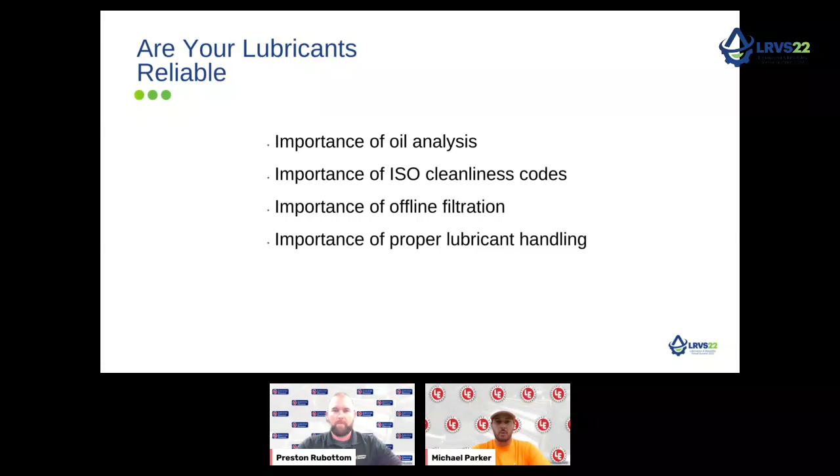Absolutely. So our presentation, are your lubricants reliable? Today we're going to touch on 4 topics: the importance of oil analysis, importance of ISO cleanliness codes, the importance of offline filtration, and importance of proper lubricant handling. So these 4 topics are what we feel as an organization are most important to achieving best practice to the reliability of your lubricants and keeping your lubricants and assets reliable and clean. So I will start this off.

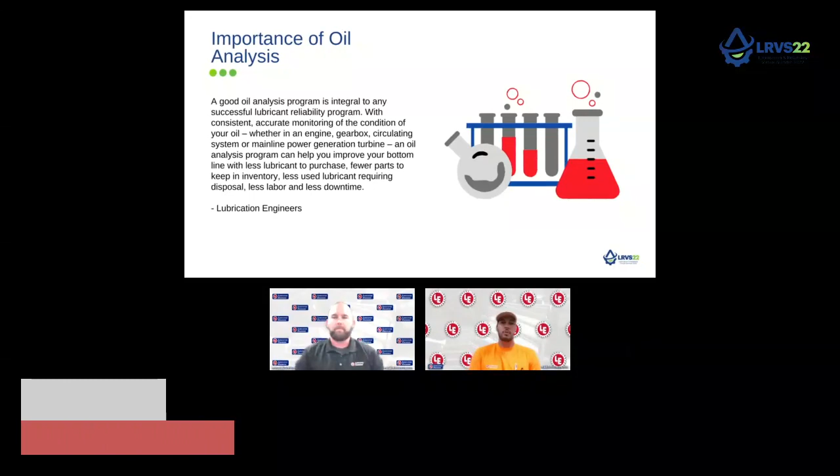Importance of oil analysis. So a good oil analysis program, right? Why is this important? Well, a good oil analysis program is integral to any successful lubricant and reliability program. With consistent, accurate monitoring of the condition of your oil, whether it is an engine, gearbox, circulating system, or a mainline power generation turbine, an oil analysis program can help you improve your bottom line with less lubricant to purchase, fewer parts to keep in inventory, less used lubricant requiring disposal, and less labor and downtime.

So when we think about lubricants and oil analysis, we think about these 2 things as being the backbone of your lubrication reliability program. So a severity scale: when we run an oil analysis, the first thing we look at on these charts that come to mind is a scale, right? You want to definitely see where you're at in a range. So the severity scale ranges from 0 to 4. And with these different ranges, you will see different language that presents itself in the comment section.

So typically 0, you're good. You're in normal limits. Your lubricants, they look great. Your assets operate like they need to, and everything's smooth. You really don't have to worry about anything. When you see 1 come along on these reports, generally the language you'll see in the comments is minor. So contamination is at a minor level. Around this time, you're kind of monitoring it, but you're really not planning to do a whole lot. I would recommend personally that you maybe pull another oil sample a little sooner just to see where you're at.

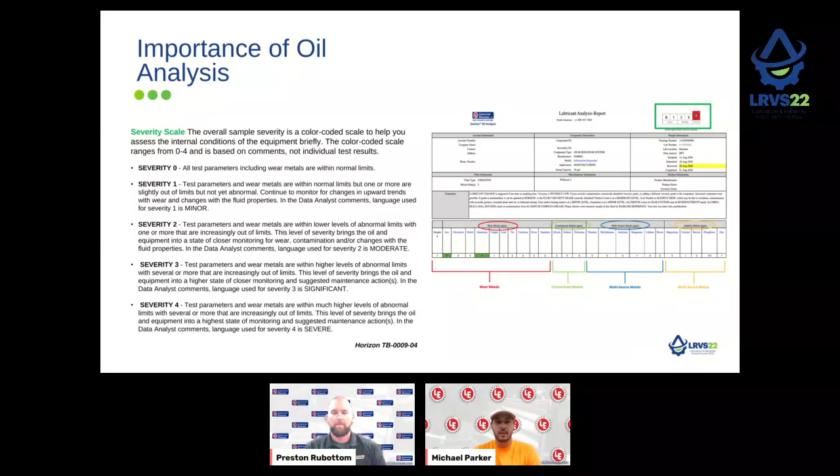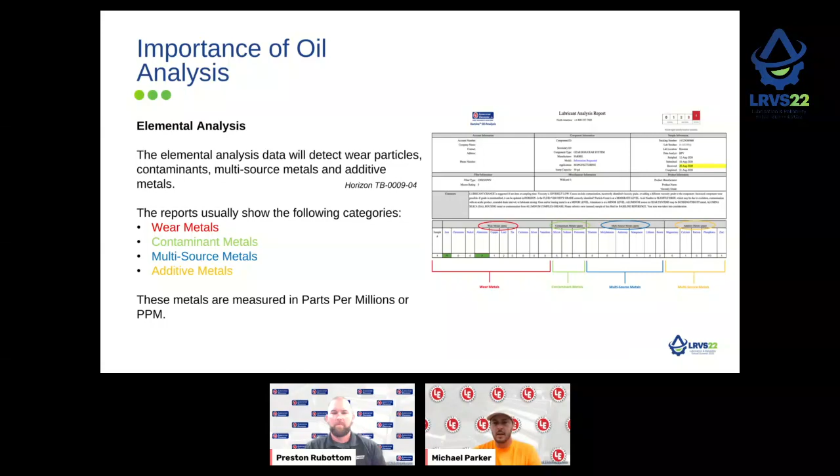So moving on. So you have 4 different categories on oil analysis. You'll have wear metals, contaminant metals, multi-source metals, and additive metals on these reports. As you can see, we have these highlighted. So these would be different categories that you would want to look at, and we'll dive into each one of these.

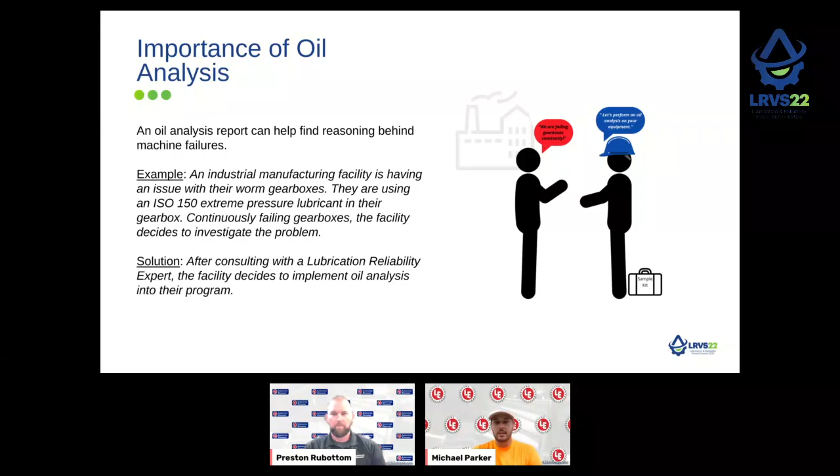So here's an example of a company that would need to look at having an oil analysis, right? This is a typical industrial manufacturing facility. They're having an issue with the worm gearbox. They've identified that they are currently using an ISO 150 extreme pressure lubricant in their gearbox, but constantly failing these gearboxes. They decide that they need to reach out to someone. So after they consult with a lubrication reliability expert, they decide to implement this oil analysis into their program to see what they can find as the cause of these failures.

So wear metals, going back to this, when you're running an oil analysis, you don't want to think of it as just the oil that you're analyzing, right? This is a bigger picture than that. You're actually diving into the equipment. You're looking at different wear patterns and trying to determine what is the cause. So wear metals can identify components within the machine that are wearing.

And it becomes really important here to understand the information that you are providing to the oil analysis company when you're submitting reports. And it's very important to submit all the information that is available to you. So all the OEM information, this will help to let the laboratory know what type of metal is in this unit. And if we see that flagged on these reports, we have a baseline to say where we at least think this is coming from.

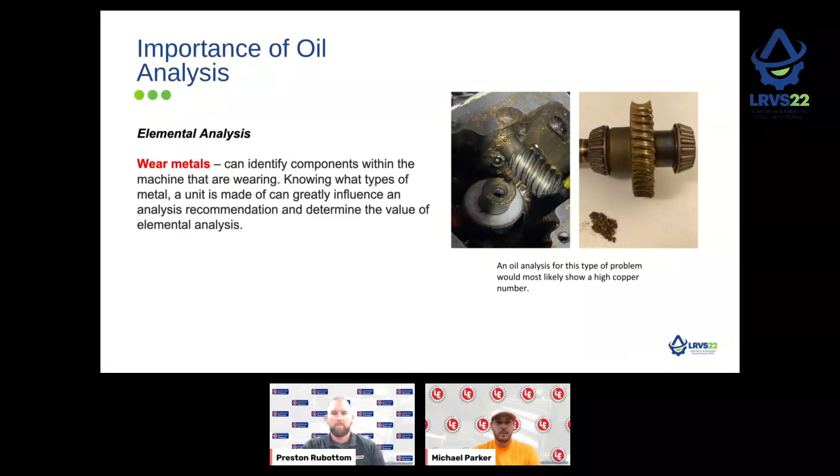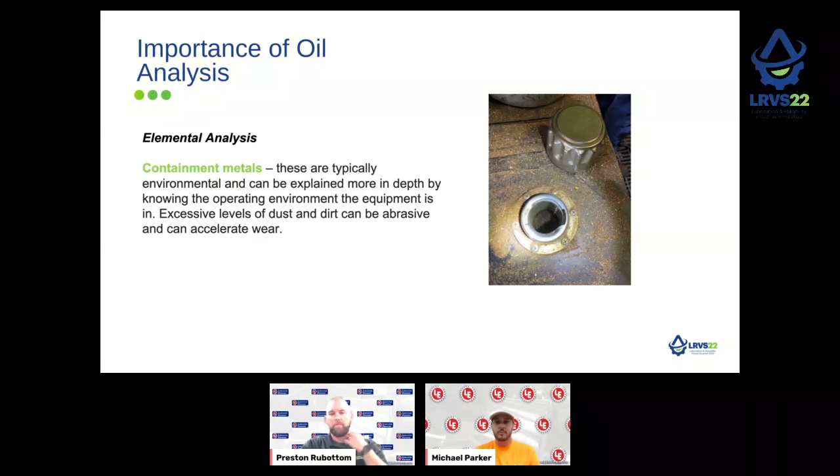So then we get into contaminant metals. These are typically environmental, and they can be explained more in depth by knowing the operating environment and the equipment. So again, it's very important to document everything when you're pulling these samples and submitting them to a lab. That way we kind of know what we're seeing in the report. This picture shows where an HPU unit has had the top left off of it, and it has been exposed to particle contamination.

Then you have multi-source metals and additive metals. These types of contaminants can turn up in test results for a number of reasons. The majority of the time, this is going to be the breakdown of your product. That's what you're going to see on these reports. So phosphorus, for example, going back to the gearbox example, if you have a report and you have a worm gearbox and you've identified that you were using an EP product, well, you're going to see that trend in this report. It's going to show a high phosphorus number, as that is what's used in an EP gear oil.

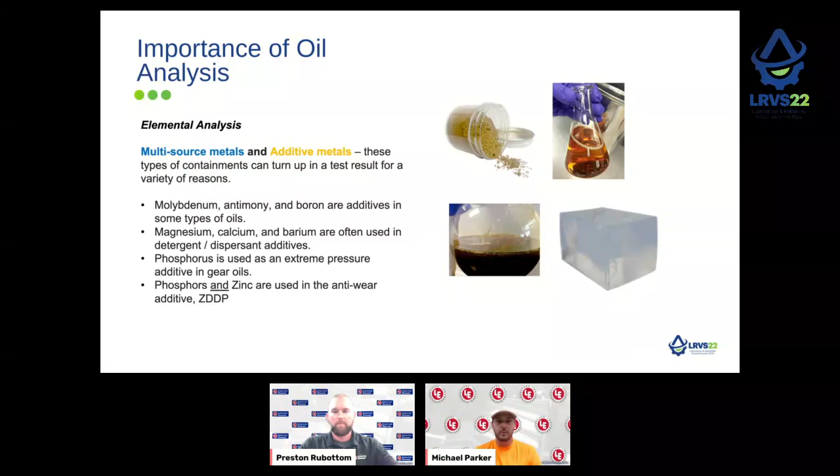So just kind of establishing, this is very beneficial for people that don't know what they're using. Maybe you had a new maintenance manager come in and he's trying to see the different lubricants and put that into perspective of these results and the equipment. This would be very powerful for them to tell, hey, these are the additive packs that we're seeing, and these are the lubricants we're using.

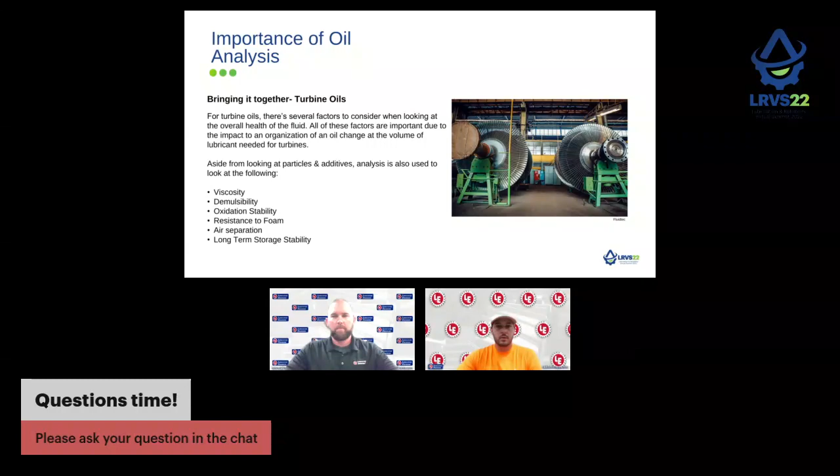So turbine oils, Preston, I was going to let you touch on this. You good with that? Yeah, absolutely. Great job.

So I kind of want to bring all that together, right? So we're looking at elemental, we're looking at contamination, we're looking at multi-source metals. What does it look like in the real application, and what else are we looking at? That's what I want to bring to light here. So for that example, I use turbine oils. Turbine oils can go very, very deep, understanding the chemistry packages and the wear modes. But fundamental knowledge is kind of what I captured here.

So for turbine oils, there's several factors to consider when looking at the overall health of the fluid. All of these factors are so important with turbine oils because there's a large volume of oil needed, specifically for steam turbine oils. So for an organization to change out, say, 10 or 20,000 gallons, it's quite the investment. So we really want to understand the full spectrum of the lubricant that's in the machine. So we typically look at the following properties. We look at the viscosity to make sure that the fluid film strength is there to protect the surfaces that the fluid is surrounding.

We also look at demulsibility, so the ability to shed water. Super important when you have a steam turbine with potential water ingression to have a good demulsibility rate. You want to shed that water from the oil and not emulsify. You want to be able to filter that out and remove it. Oxidation stability, the long-term life of that fluid is critical to know to give a proper planning process there.

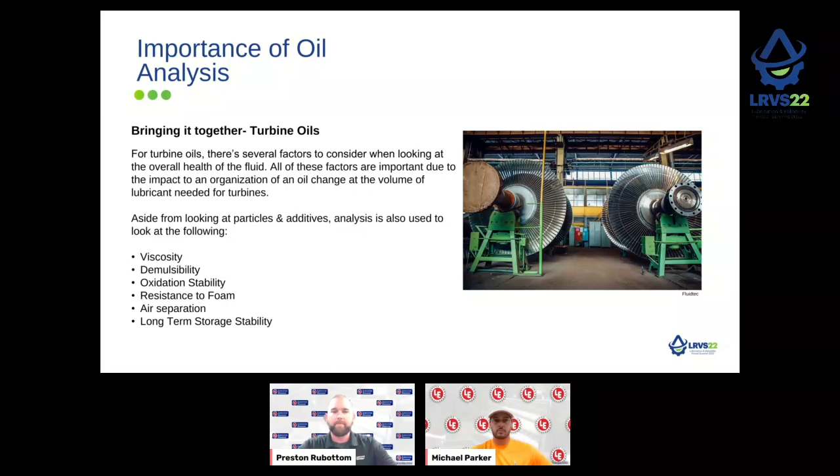Yeah, okay, thank you, Preston.

I'm sorry. Absolutely. So as we're looking at oil analysis, it's important to understand the ISO particle count. So we're going to dive into what ISO cleanliness is and what the particle count is. The ISO code is the standardized code of how many particles are in a sample when it's sent into the laboratory. So we use this scale to quantify the particulate contamination per milliliter of fluid. Each of these numbers represents the correlating particle size of 4, 6, and 14 micron particles. So each code includes all particles of the specified size or larger.

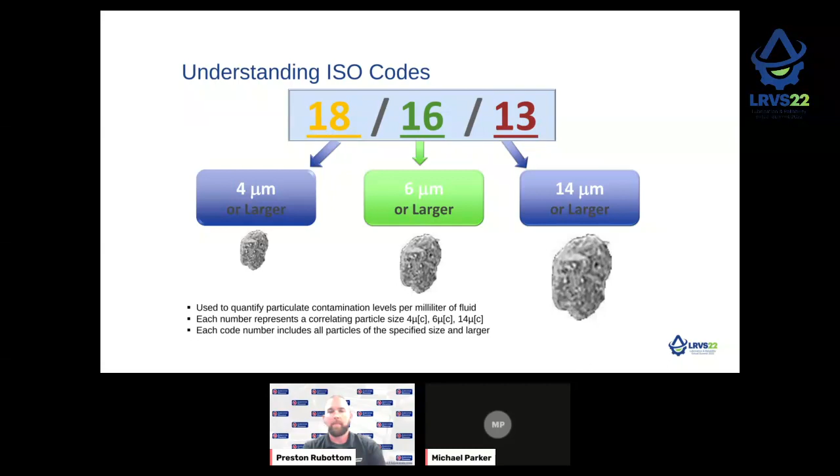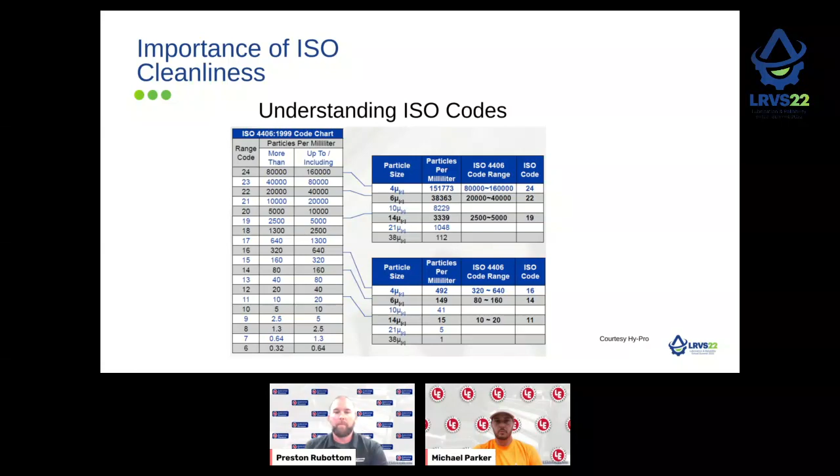So although you're armed with the knowledge of, hey, we have a 16, 14, 12 ISO particle count, well, what does that mean? How do I understand what fluid cleanliness needs to be for a certain asset? There are certain targets that are industry standards that are available for you to review and set up as your target for your program to make sure that the fluid is clean enough for the tolerances within that machine. So these are some examples here.

Obviously, the higher the pressure, the tighter the tolerances of the machine, the cleaner the fluid needs to be. So with hydraulics, with servo valves, you want something around 15, 13, 11. That's extremely clean. You're going to have efficient filters in place, and you're going to have a very good scheduled process for filtration. Something with larger tolerances, such as a gearbox, you have a higher particle count.

At the bottom of this chart, you can see where they're recommending a filter micron of 12 micron for gearboxes, whereas if you need a count achieved of 15, 13, 10, you'd use a 5 micron. So the tighter the tolerance, the more strenuous the path, you're going to have a lot more cleaning capabilities with those.

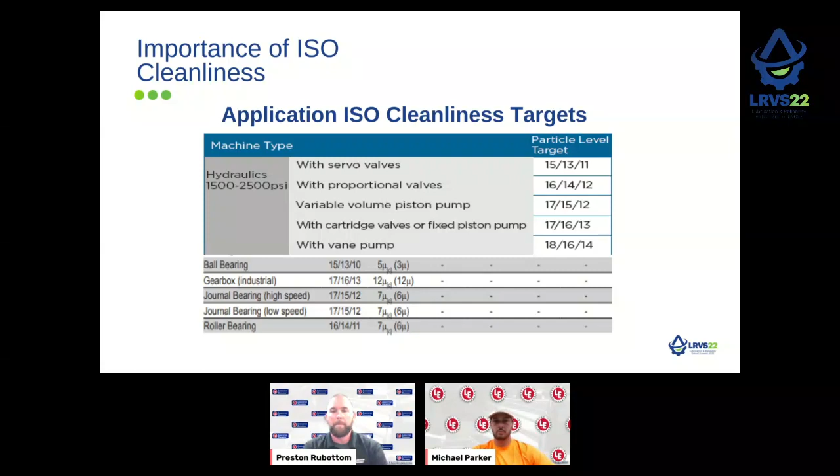So this is really what it comes down to with filtration. We want to extend the life of the asset, right? We not only want to extend the life of the asset, but also the fluid. So these are target codes of fluids where we're looking at two different assets, a rolling contact bearing or a hydraulic component. So for example, if you have a sample that comes back, say the hydraulic unit, it comes back at 25, 23, 20, like Michael just showed the picture of a hydraulic power unit that was heavily contaminated.

So we can see the visual contamination, knowing that the human eye can see down to 40 micron. Those particulates are very large that we need to remove and keep from going in there. So we have extremely dirty hydraulic oil, 25, 23, 20 comes back. If we have effective filtration, it can stop the contamination and ingression, get down to, say, 16, 14, 11, that target code. We're going to extend the life of the componentry of the whole asset train five or more times. So it's critical for the life extension of that machine, also the overall runtime.

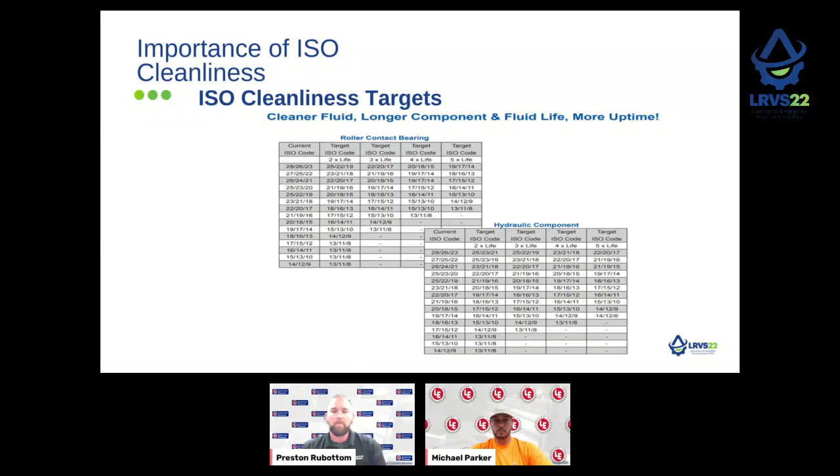So we talk about the particle ingression, but what does that have to do with the overall usefulness of that machine? Well, it's been said that 70% of loss of machine life is due to surface degradation. So again, a hydraulic unit, 1500, 2500 PSI, severely dirty oil acts almost as a mechanical sandblaster, eroding all the surfaces of the machine, either tight tolerance valves or rubber components, that continually compound and get dirtier and dirtier, that ultimately leads to failure.

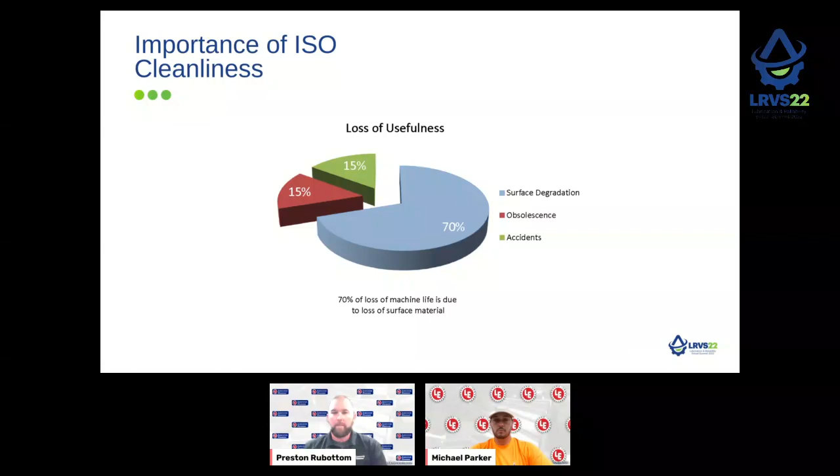So of that 70%, we look at how the wear mechanisms are formed. We have three-body abrasion, which is the contamination from outside sources or internal degradation of surfaces. We also have 8% erosion and fatigue. So altogether, 82% of that mechanical wear is caused by particulate contamination, either generated inside from having dirty fluid circulate or taken in from outside sources. So filtration is critical, but also understanding where to start with your ISO particle count is the first step.

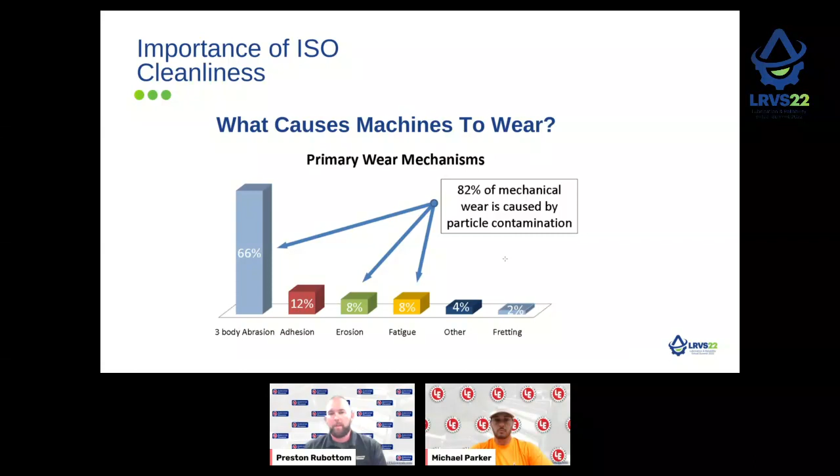Okay, so we know the particle counts. We're understanding how to scale and where we need to go. We have our target ISO particle counts, but how do we get there? So we're going to look at a few different offline filtration options here.

Why do we need to filter? So brand new oil coming to the facility in drums, totes, pails, even tankers doesn't meet the cleanliness codes that I showed before. So for this reason, brand new oil should be filtered, either as it's going into the asset with a filter cart like you see here on the left, or with your storage system that has dedicated filtration. So knowing that your fluid is clean before it goes to the asset is going to be very advantageous.

Some people will also say, hey, we have inline filtration on the machine, so we have spin-on filters and other bag-type filters, duplex filters on the machine. Isn't that good enough? And typically the answer is no. So we're looking at different efficiencies of filters and mechanisms within the filter housings that could potentially lead to dirty fluid being circulated around the system. And also understand that offline filtration is called depth filtration in more cases than not, because it's a very tight path of travel to capture very small particulates.

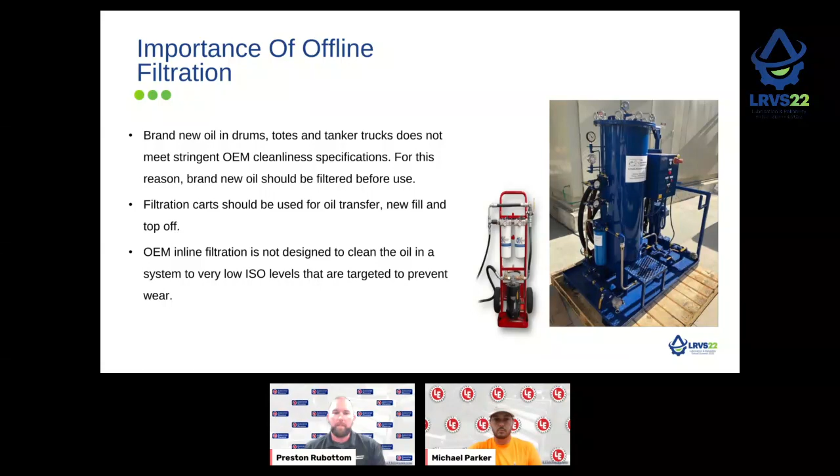So looking at different types of contamination, water, as I mentioned earlier with the steam turbine, is a very large potential contamination. So we want to understand that there are tools available to remove water from lube oil. Through the process of vacuum distillation, all the water contamination is removed, so free, emulsified and dissolved water.

This system works by pulling a vacuum on the upper chamber. So you have lubricant that's emulsified with water. As this vacuum chamber comes down, we're boiling off the water, so we're able to evaporate the water out under a little bit of heat with vacuum. We also use the same principles with gases, so we can pull process gases or different gases that get in lube oil out with this system. These systems are also equipped with a particulate removal system, so very effective filtration, removing a large percentage of contamination per pass.

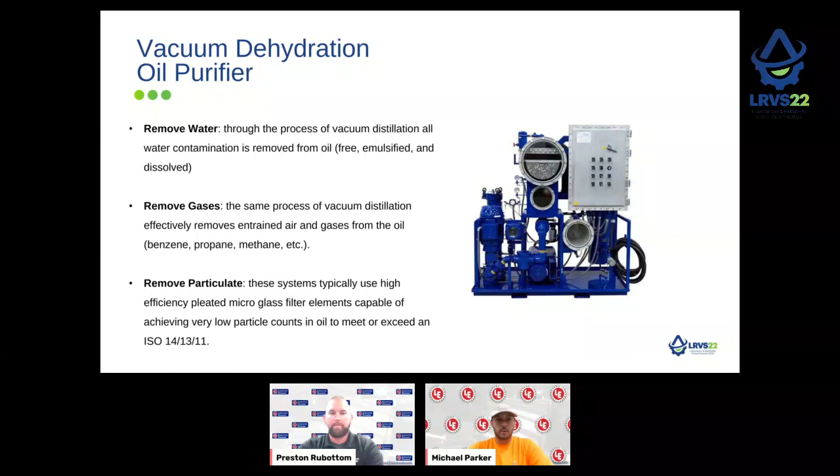Okay. Next slide. Yeah, has it popped up yet? Yep. Sorry, okay. A little delay on my end, I guess.

The next contamination we talked about is varnish potential in turbine oils. Very effective filtration here. This process uses either granular adsorbent or depth media to filter out and remove dissolved and suspended oil degradation products. All of those products actually lead to varnish, so we're trying to get ahead of that varnish plating out by using this offline filtration system. Varnish removal is often accomplished with oxidatively stable media engineered to selectively remove varnish contaminants. So we're not going to pull additives out or worry about changing the chemistry, solely the contaminants that lead to varnish.

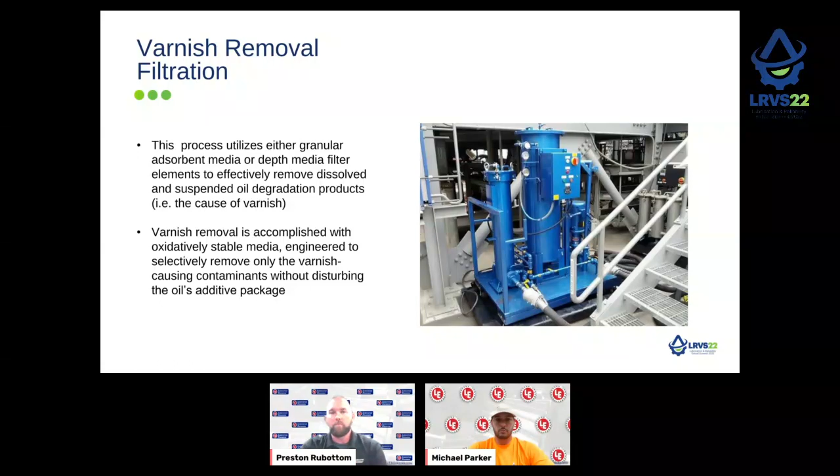So I mentioned there are several different types of filtration, and filtration is not one size fits all. Just a couple of key points when you're looking at filtration: filtration systems must be configured properly for optimal performance, considering the tank size, the oil viscosity, and oil temperature. We have to understand what the flow rates are, and how we can effectively filter in a timely manner.

By recirculating oil multiple times through one or more high efficiency filter elements, you can quickly and reliably lower the particle counts. And keep in mind that kidney loop filtration used on bulk tanks, oil totes, and drums is a very important, effective way to ensure that new oil is clean. Removal of particulate contamination, even with high efficiency filter elements, is not 99.9% effective in a pass, so we have to recirculate and capture more of the particles.

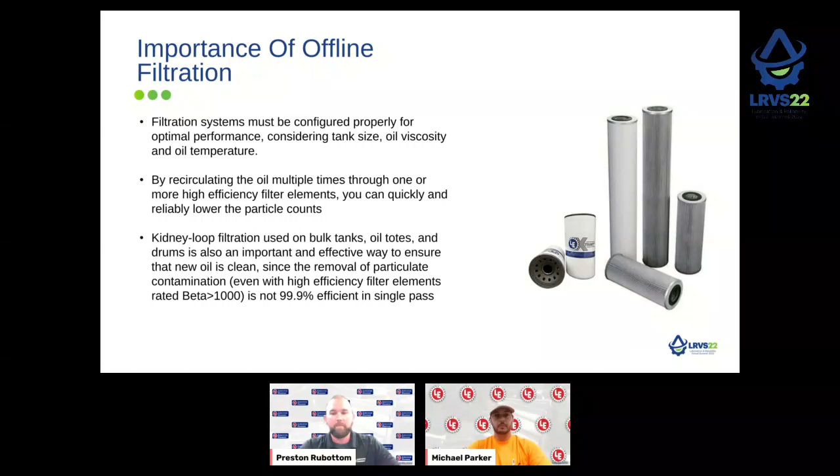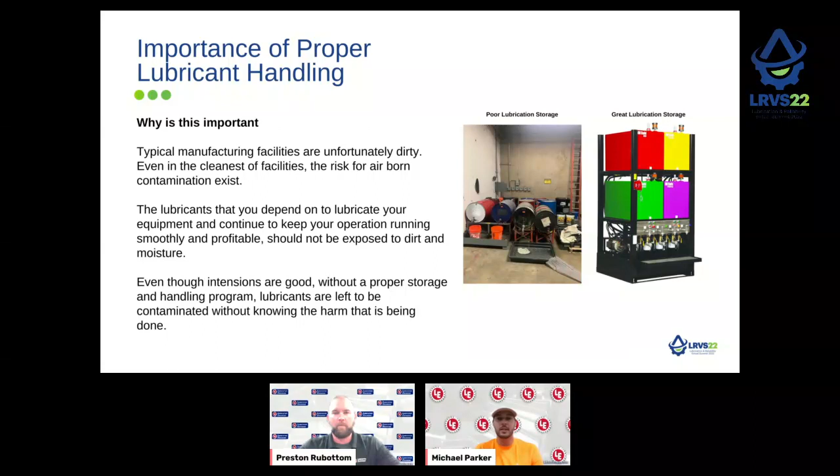All right, thanks, Preston. That was very informative. Playing off that, I'm going to dive into the importance of proper lubricant handling, which goes hand in hand with offline filtration. So here you'll see some lube storage units and a poor lubricant storage system. So why is this important? Well, a typical manufacturing facility is unfortunately going to be pretty dirty. Even the cleanest facilities have the risk of airborne contamination.

So when you look at these two pictures, the one on the left and the one on the right, the difference is that you have a proper way to not only store these lubricants, but also a way to filter them as they're being stored. Back to what Preston was saying, new oil coming into your facility is not clean, and it definitely needs to be filtered before entering your assets.

You depend on these assets every day to keep your operation running at 100%, so you definitely want to make sure that these lubricants are clean. With these units, you have the ability to filter the product before you put it in the system, filter it as it's leaving the system, and also kidney loop it within the system.

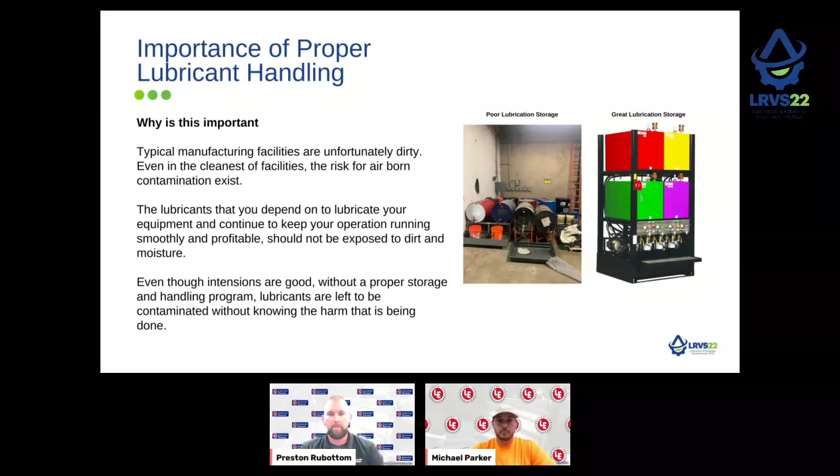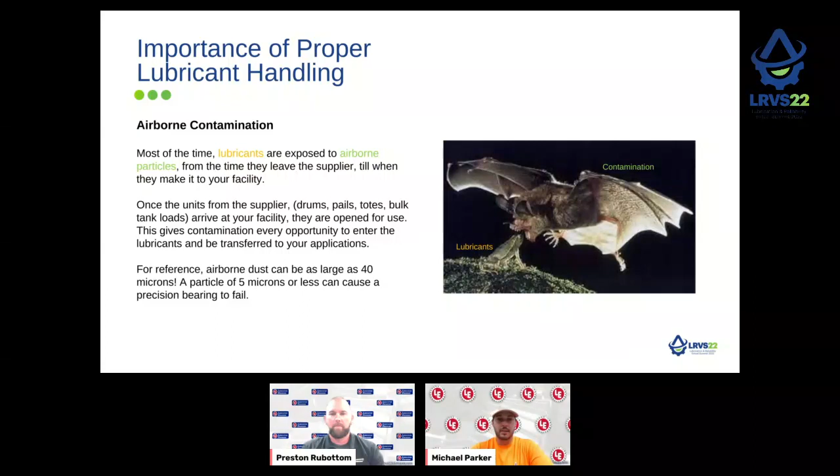So if this frog represents lubricant, you can see it's being highly contaminated by this particle. And before you put that into an asset, that can be devastating. So we're definitely wanting to get rid of these contaminants before they're able to hit the lubricants and be pumped through your equipment. So how do we go about that?

Well, besides doing offline filtration and proper storage, there's something else that plays a part in that, and that's these adapter kits, right? So you take these adapter kits, you put them on your hydraulic systems, your gearboxes, and they allow you to do several things. You're able to quick connect on these adapter kits with the filtration system to pump your lubricant into the system without having to open a reservoir cap like we saw on one of the slides that I had before, where all the debris was all over this hydraulic unit.

Well, you can put an adapter kit on there where you don't have to unscrew those reservoir caps at all and easily be able to pump your lubricants in there, and also be able to kidney loop them while they're in the system. So along with this, adapter kits serve other benefits. You're able to customize them. So if you want to get to a state-of-the-art lube program and you want to identify your lubricants by color and shapes, you're able to do that as well. That way you kind of cut out the cross-contamination between lubricants.

And then part of this is the desiccant breather. So you have these desiccant breathers that are able to eliminate rust-forming condensation. They prevent sludge deposits and water contamination, and they're ultimately going to reduce wear and tear on your equipment and provide longer oil and filter life if you can keep the moisture and those contaminants out of your lubricants.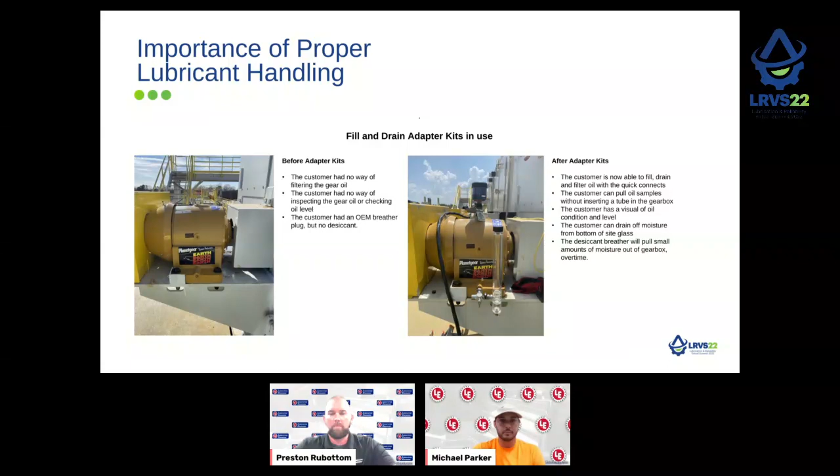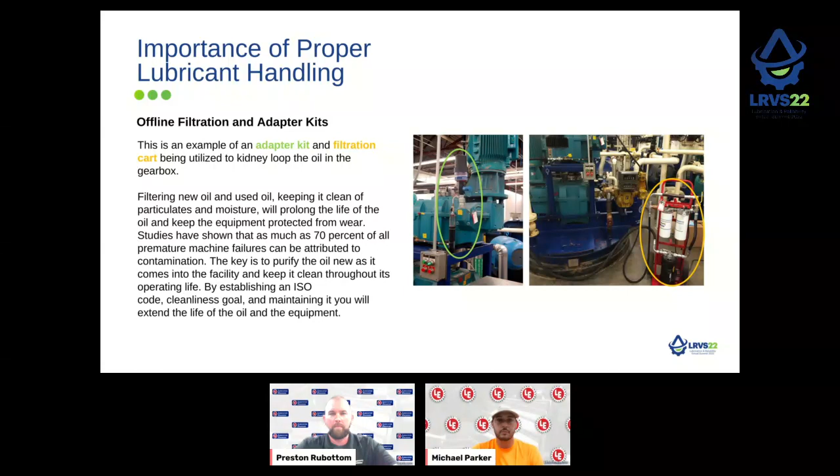So a quick summary: by implementing these best practices that we've reviewed, it is our goal to have provided you with the information to apply at your organization, and not only define lubrication best practices, but also consider your lubricant itself as an asset to extend the life of your lubricant and rotational assets. So Preston, you have anything you'd like to chime in? No, you did a great job there. Just the summary of driving reliability focused around your lubrication definitely pays off in multiple different ways.